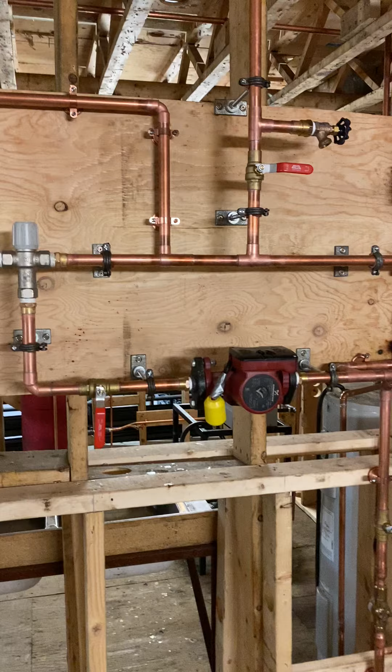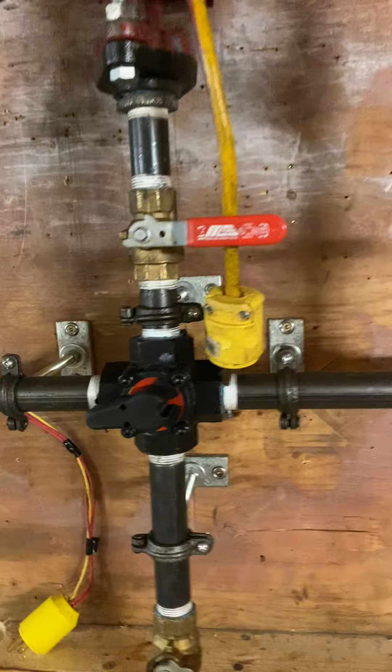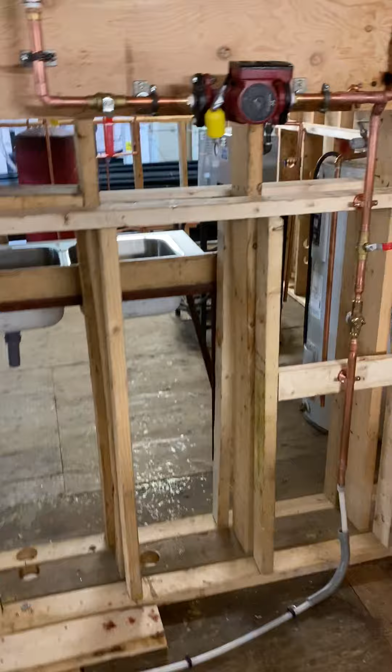Hello everyone. In this next video, we're going to take a look at the three-way mixing valve and the four-way mixing valve. You would use these valves if you're going to install in-floor heat. These white pipes right here above the floor and the ones up here in the ceiling heat the floor above. Okay?

So far we went over an oil-fired boiler with a baseboard rad. We went over an electric boiler with a cast iron rad and an indirect hot water heater. So in this video, we're going to take a look at mixing valves for in-floor heat. The reason why we have a mixing valve right here, this is called a three-way mixing valve, is because the temperature you want going through these white pipes in the floor is quite a bit lower than what you would use to heat up a cast iron rad or a baseboard element.

The maximum temperature that goes into these pipes is roughly about 140 degrees and can be all the way down to 90 degrees. The temperature difference just depends on the application. If you have it in a house, you would probably want these pipes to be hotter, say around 130 or so, whereas if you had this in a garage or, for example, the school down here, this mixing valve would probably be set for around 90 degrees, okay? The reason for that is because if it's in a shop or school, you're working, and it'll just make you that much hotter if the floor is 130 degrees instead of being set at 80 or 90.

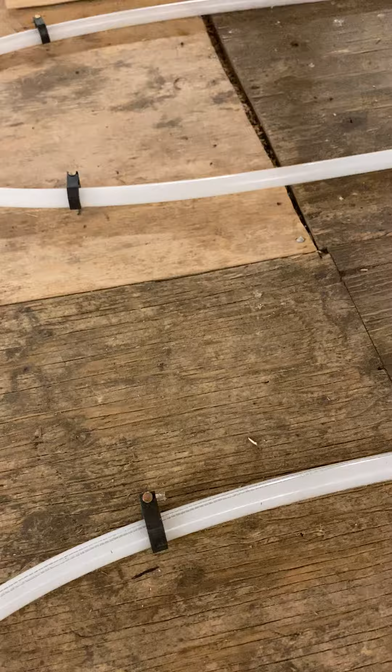You notice these pipes right here, they just stop. There's just basically one little loop. If this was in a house, those pipes would go all over the floor, all over the mock-up, folks. Everywhere that we walk, there would be these pipes. And you can see how they're installed. It's just with the Astro clips or J clips that we were using to run the hot and cold water lines.

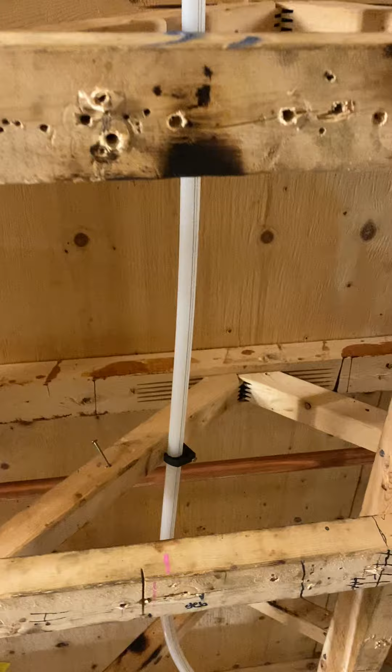Now, up in the ceiling, it's the same thing. You can see the J clips or the Astro clips are hung off of every floor joist, right? We talked about this in class, Preston, about the hangers for PEX pipe. It says in the book you can go every 32 inches, which pretty much is every second floor joist. But when you put hot water through it, if we didn't have those clips on every joist, the pipe would sag down like spaghetti, right? And you wouldn't want that. You want to keep the pipe up inside the floor joist.

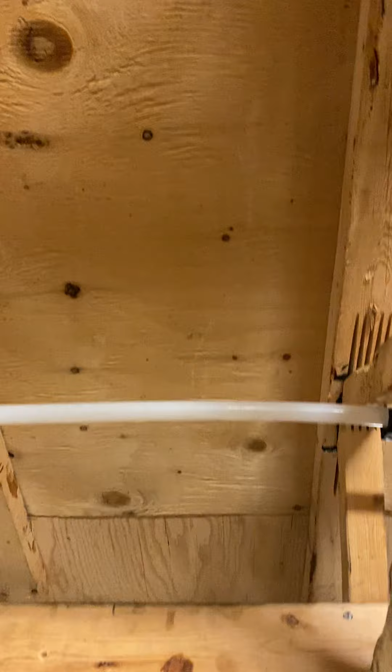You can also notice in the floor joist there's a space. This pipe here isn't right below that plywood. The reason for that is, if I put that pipe right against the plywood, like we did down here on the floor, and up top I was going to install hardwood flooring, it comes with a spike that's about 2 or 3 inches. So if I drove that spike down through the wood, I wouldn't want to come through and hit that piece of pipe. It will cause a leak.

Okay? Now down here, where we have it on top of the wood floor, what they would do in this situation is over pour this with a Gypcrete. It's like concrete, it just doesn't weigh as much. The concrete would come up above the top of these pipes, and then you would have a concrete floor. Either way works. The overpour, in my opinion, is more effective because it's right below the floor. Up here, you have to heat up the area. You would have to insulate this so it would heat the floor above you. And again, we'll get more into that when you guys get down here and start going through the modules.

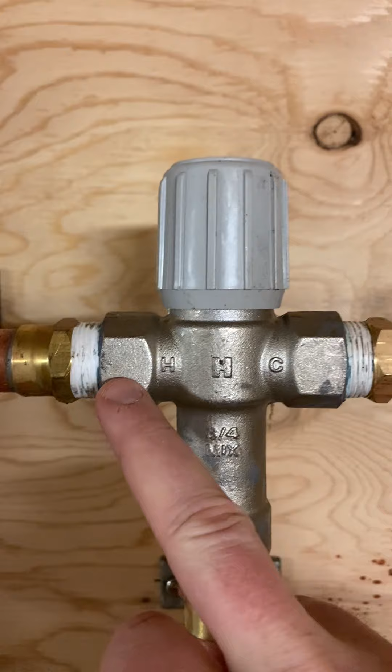So we go back over to this three-way mixing valve. You guys can notice there's an H, a C, and a mix, okay? H is your supply, C is your return, and the mix is the water that we're going to put down through the pump, through the zone valves, and into the in-floor heat.

Okay? It's extremely important that you hook it up the way it shows you right here. You can't put H over here and vice versa, because what happens is you'll have the return going into the supply and the supply going into the return. Your H is basically your supply line. So that would be the hot water coming off the top of the boiler into here.

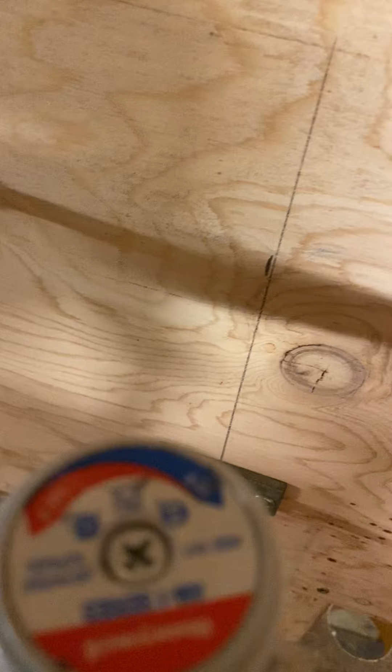This valve also, the top of it, you can turn the handle one way or the other, left and right, and you can increase or decrease the temperature that you're putting into the in-floor system right here, okay? So you turn it one way or the other way, depending on what temperature you want, okay? So right here will be the supply line.

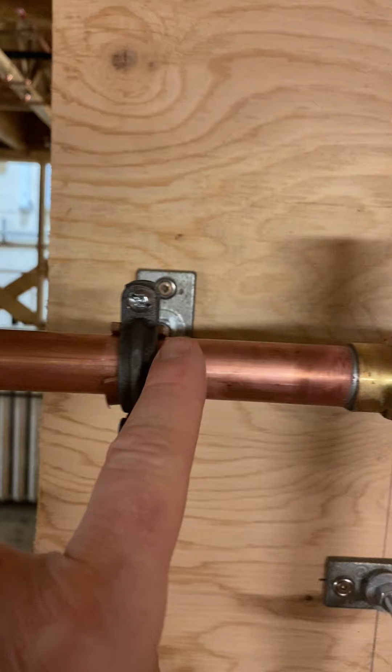So this here will be coming from my electric boiler, my oil fired boiler, my propane, something that's gonna heat up my water. So it'll be coming in through here, let's say at 180 degrees. It's gonna hit this mixing valve. It's gonna come down through here. It's gonna turn, go through this ball valve.

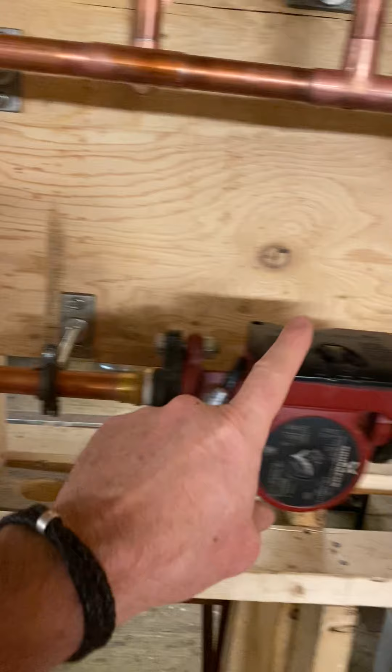The reason we have this ball valve on here is because this pump is gonna break. So we wanna be able to isolate the pump with this valve so we can fix it, okay? It's gonna come down through here, through the pump. It's gonna go down, in through the heating system, right? All the way through this pipe.

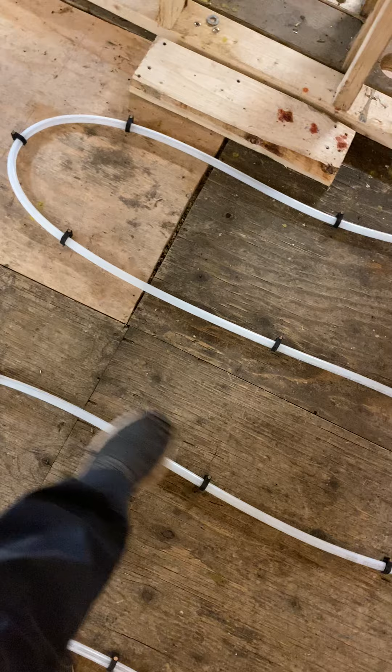It's kind of cool when we're down here and we get to start this up. All these pipes here, you'll see bubbles. There'll be bubbles flying through here until we get all the air out of the system. It comes back here, it goes over.

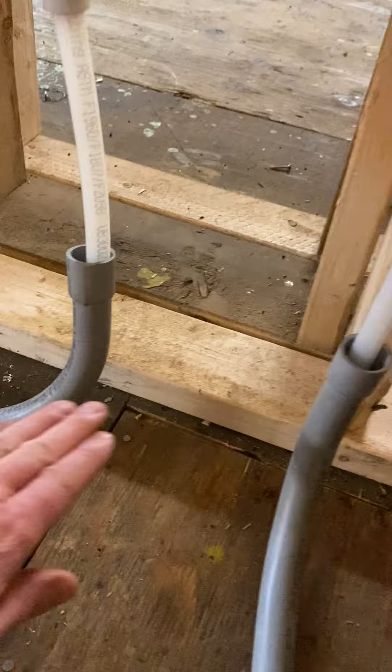And you can see we have a couple of these PVC 90s on here before going through the floor. They serve for a couple reasons. One is to make a nice 90-degree bend so I don't kink the pipe. And the second one is for concrete. They're gonna be pouring concrete up along this floor.

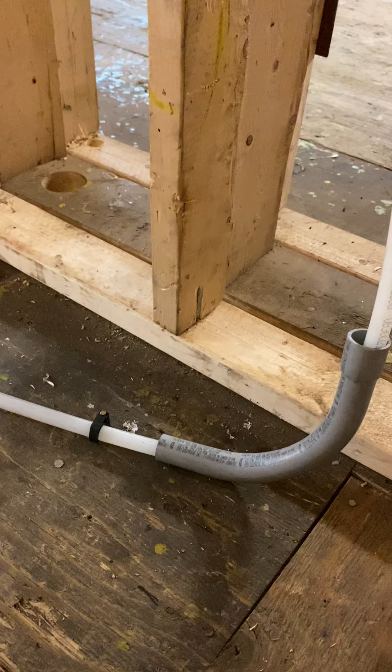You don't want the concrete to be right against the pipe, because when they go to finish this, they're gonna have a machine go over this. Kind of looks like a big fan on the end of a handle, kind of like a lawnmower. And these fans just turn and turn and turn and smooth the concrete so there's not a whole bunch of bumps in it. When they're doing it, they don't take care of anything.

So they would just take that machine right up against here. Those fans would go and hit this pipe. If this plastic cover wasn't on here, they'd probably cut that pipe in half. So that's why you always want to put these on when you're turning up out of concrete.

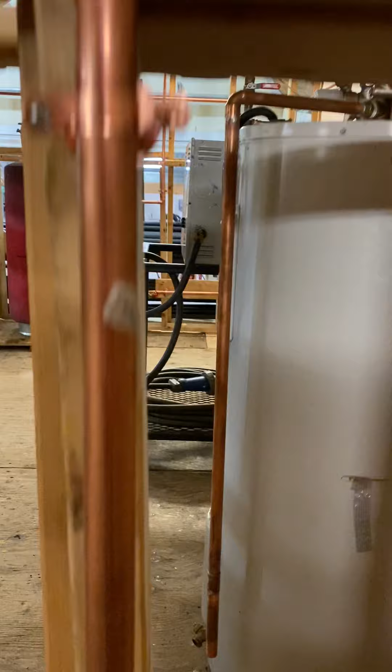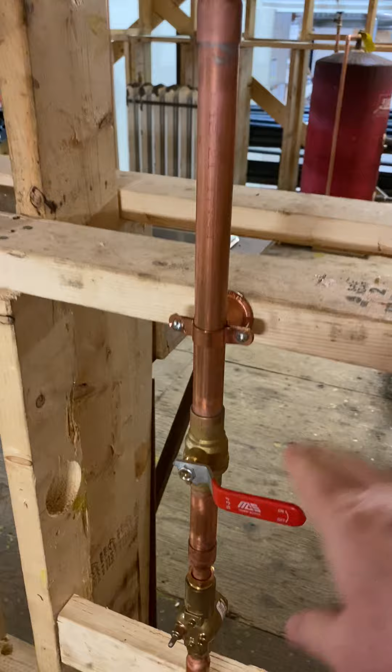So then we'll come on back up here. You'll see, back up here, we have a boiler drain. Again, that's to help in case we need to get the air out of the system. And then we have a ball valve, right? And we have a ball valve here that we had on the supply so we can isolate this loop. The water comes back up through, in through here.

Now this is where it gets kind of cool. Right through here, this is my return. So this pipe here would go back to the boiler to get reheated, right? To go through and then come back through the supply.

But what happens right here is this mixing valve will take some of this water through here and it'll mix it with the hot water coming in. So the cold water coming in here is mixing with the hot water to the temperature that's set on top of this valve that goes down and in through the pump.

So when the water's coming back through the return, this mixing valve says, okay, I want so much water to come this way. I'm gonna use it to mix. The other water that I don't need, I'm gonna send back to the boiler. It's gonna go up here through the return, all the way back to the boiler, get reheated, and then come back down in through the supply again. Right, and then this is gonna go through the pump.

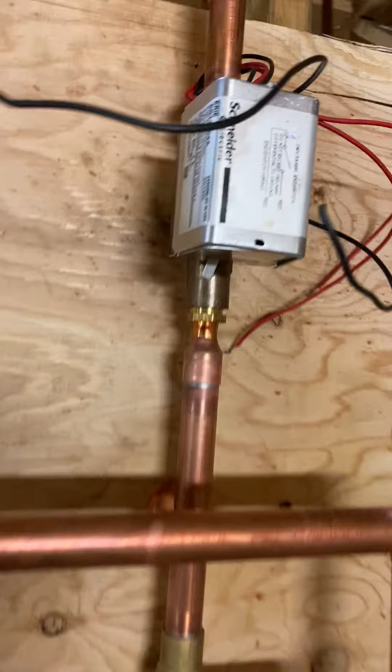So what I have over here is, we were talking about zone valves before, and I was showing you this part, right? This is the control part that goes on top of that part. And once we get down here, I'll show you how they go together. This just basically clips onto here, and these wires will go to your thermostat.

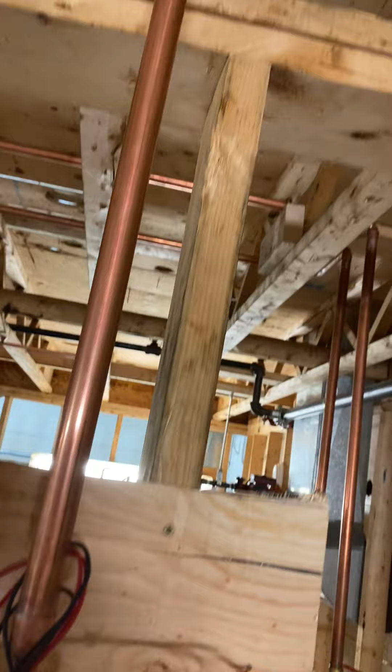So let's say I'm cold, I go home, I turn my thermostat up, it sends power down into this valve. This valve opens up, the zone valve, and then it says, okay, Mr. Pump, over here, I need you to pump water, and what you gotta do is pump water up and through to the zone that's upstairs. And the water's gonna go through all those loops, all the way down through here. It's gonna turn and come back.

And again, you take a look at the mock-up, all this ceiling. If this was my house, I would have in-floor heating pipes all through here, okay? And then the water will come back down the return, goes through this valve, comes back down here, goes this way, and then again, goes over to where the mixing valve is.

And the mixing valve says, okay, I'm gonna take a little bit of water through here and go down here and mix it with whatever this is set for. Whatever water I don't need goes back to the boiler. And again, it's a closed loop and keeps going over and over again. So I just wanted to show you what the head of that control looked like.

When you buy a zone valve, it comes in two pieces. It comes with that head and it comes with that body, okay? So the body and the head just clips on and off here. And we'll show you that again once we get you down into the shop.

Now this would be two zones in this system. There's a zone here for upstairs, and I would have another zone down here for downstairs. So if this was my house, I would have two thermostats. I could have 10 of these. I would just keep on going through here, put a zone valve, zone valve, zone valve, all the way across, and every thermostat would connect onto this.

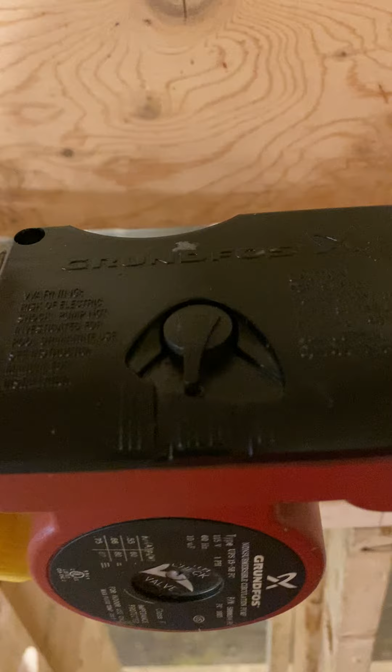The only thing that happens with this, if I had 10 zone valves, this circulator pump will be running a lot more than if I only had two. And it's designed to do that. You can see in the top of this pump, I hope you can see it right there, there's low, medium, and high. So you can set this to whatever speed you want.

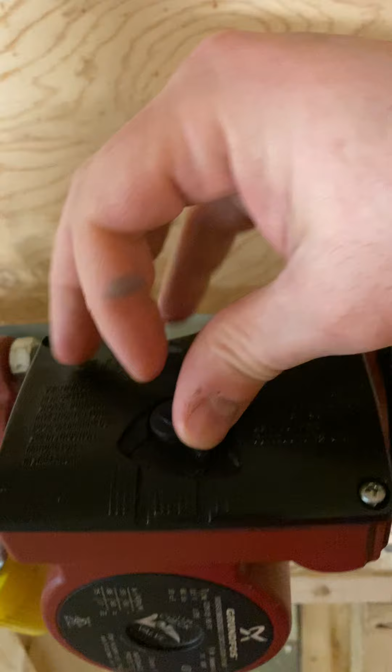I always just leave it at high. I don't know why, that's just the thing that I do. Every one I have at home, I have it set at high, but if you're only at a small house or a couple loops or a garage, you might only need it at low. And basically, the high, low, and medium is just how fast the propeller in this pump will spin.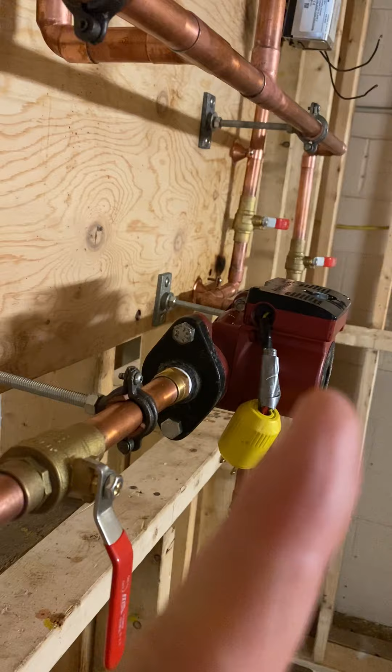Okay? And on to another note, we were talking about hangers and supports in the last course, and we're talking about split ring hangers, which are right here. We had those, and we're talking about ceiling flanges. You'll have those. And then we have a piece of threaded rod in between the two, okay? I could cut that threaded rod whatever length I want. I could have it out here, or I could have it in smaller, whatever you want.

So when we did this one, you can see all the threaded rod are cut the same because I want the project to be nice and level on the wall, okay? You can also note in this split ring hanger right there, there's a piece of red rubber. And again, that's because I don't want the copper to touch this part of the steel.

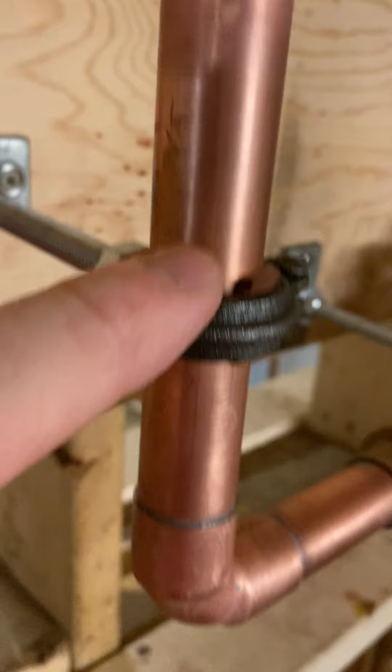Because if I do, the steel is gonna eat a hole through the copper, and I'm gonna get a leak. So what we do is put a little piece of red rubber in there, and we'll be going over that once you get down to the school.

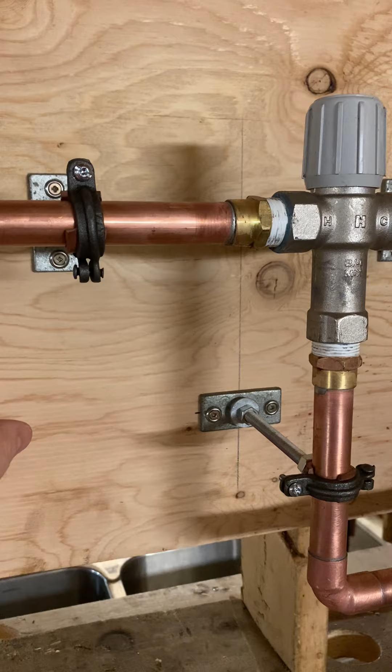We have a whole great big sheet of it, and we just cut off what we need. And we put it in each one of the hangers in there. Now, if this was black iron steel pipe, I wouldn't need that because the hanger and the pipe are made out of the same kind of steel. So one is not gonna rust out the other one. So that's your three-way mixing valve.

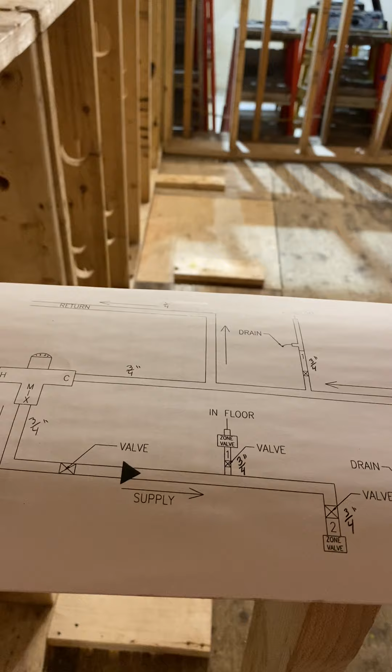So you got to design this project. I don't care how long you make them. I just want to make sure you have everything in sequence, so this piece of paper matches the project that you're going to do. Okay, so this one here, when we did this one, we went over to the right, but next time if I wanted to, I could take this and go over to the left. It just means I got to switch the hot and cold, switch this valve the other way to pipe it up. Okay, so that's your three-way mixing valve.

What we're going to go over to next is the four-way mixing valve, okay? Again, you would use this valve for in-floor heat. You can see the in-floor heat in this one. We put the loop up in the ceiling. This valve is designed in case you have in-floor heat plus baseboard radiation. This valve lets you do both types of heating with one mixing valve, okay?

You can also notice when we hook this one up, guys, a lot of it is done in black iron. And again, the reason for that is price. If I try to do all this with copper, which I could, it would cost me probably 4 times more than what it would if I did it with these black iron fittings. So that's why we did all this with black iron. And then afterwards, as we get up past the pumps and the zone valves, we convert it over to copper. And again, once you get down here and we do the projects, we'll show you when to convert over and when you don't.

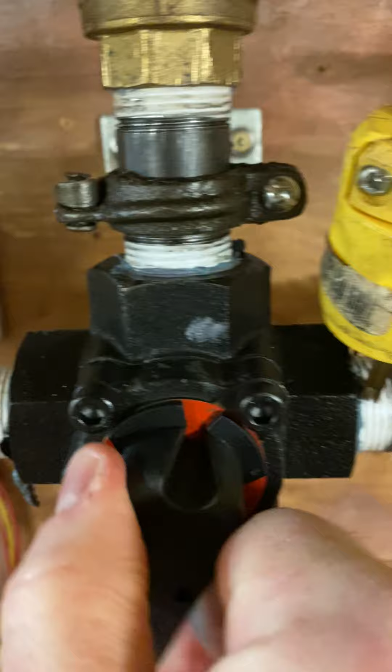Now on this valve, you can also see there's a handle in the center of it, right? And there's numbers. You just turn the handle to what number you want for the temperature that you want to put in through the mixing valve, in through your in-floor heat. Now when you buy one of these valves, all the literature will come with the valve in the directions. So it'll tell you, okay, number 9 will give you 140 degrees or something like that. And then number 5 might give you 110. It'll tell you what each number is and what the temperature is for.

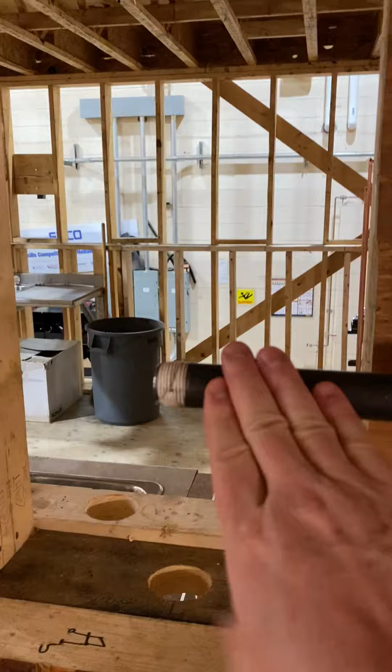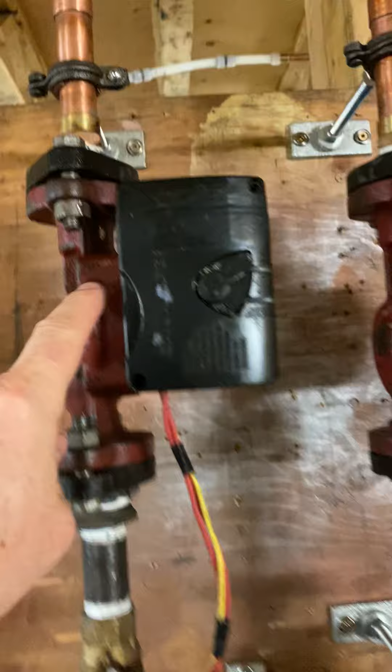The same thing goes with this one. This line coming in here, going in this way, is the supply line. So this is the hottest water coming from the biggest pipe off the top of the boiler. It's coming in this way. Before we hit the mixing valve, we have a T. As we follow this T up, we have an isolation valve because if the mixing valve is gonna break, we wanna be able to fix it. And then as we come up here, we have a zone valve. Then we have another valve to isolate the zone valve. And then if you follow this pipe, it runs over and down and in to the baseboard rad, okay?

Remember, like I said before, baseboard radiation takes a lot more heat and hot water to heat up the room than it does with in-floor heat. So when we go back to this project on the wall, as you can see, the first tee coming off before I hit the mixing valve will be the direct hot water from the boiler. So this here could be up to 200 degrees.

So this water's coming through here, this pump is kicking in, it's going up through the zone valve, all the way down through the copper line, in through the baseboard. And as we follow the baseboard, if we put water out, we've got to get water coming back, which comes up the return right here.

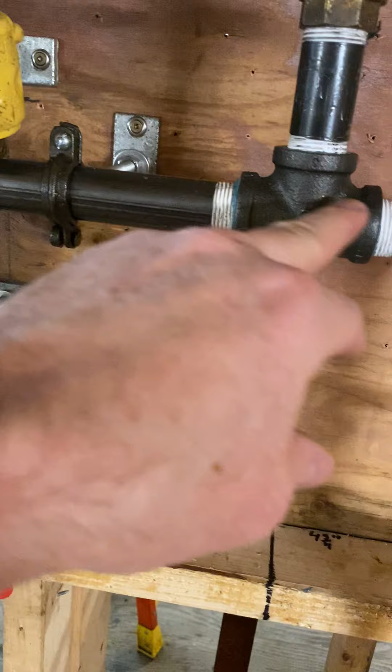Okay, as the water comes through the return, it goes into the mixing valve. And again, the mixing valve pretty much does what it says. It mixes water. So it's going to mix the hot water coming here with the return water. Whatever it needs to mix, it's going to use, and then the return water is going to come down here, back to the boiler. So that is the heating system for the baseboard rad.

Now what we're going to do is follow this pipe in. We've already done that pump. That's for the baseboard rad. We're going to come into here, into the mixing valve. The mixing valve is what we're going to use to heat the loop that has the in-floor heat, okay? Because remember, for in-floor heat, we don't want any more than 140 degrees because we're heating up the whole floor. So in a house we usually use it around 120 or so.

So I would turn this to whatever desired temperature I would want. I would turn my thermostat on. My thermostat would start this zone valve. This zone valve is going to say, okay, circ pump, time for you to kick in. The circ pump's going to kick in and draw water off of the mixing valve, which is the supply line here, right? So this pump's going to start pulling.

It's going to pull water in through here, turn, go up through the mixing valve, up and through the circ pump, up and through the zone valve, and then up and through all the in-floor heat loop that you're going to have in your house. It's going to come back down the return, right down here.

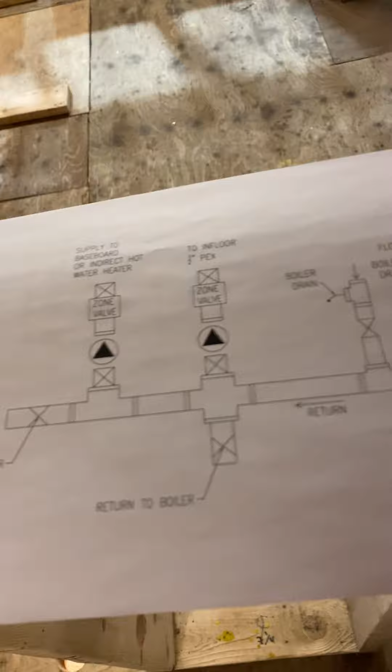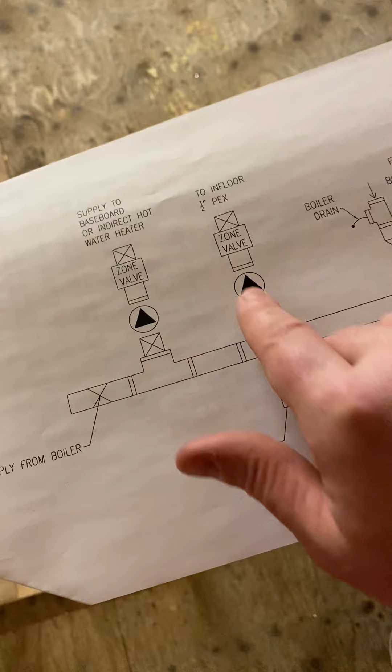And we are also going to get a piece of paper. You'll get your drawing, just like we did for all the other projects. Same as the other ones, it'll tell you the sequence I want everything in and what they are, right? But it doesn't give measurements. Right along here, there's no measurements of how long these pipes should be. That's up to you. That's when you go over to your work area and you start designing your own.